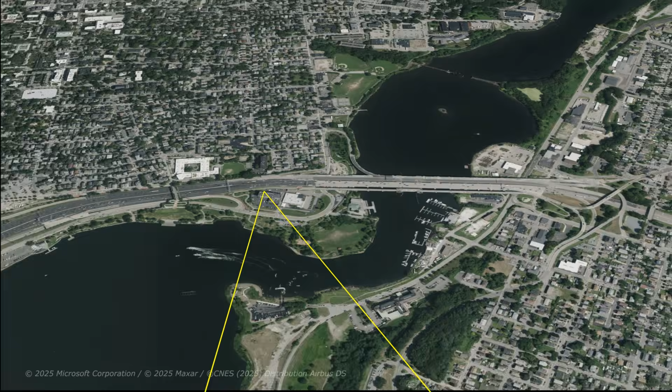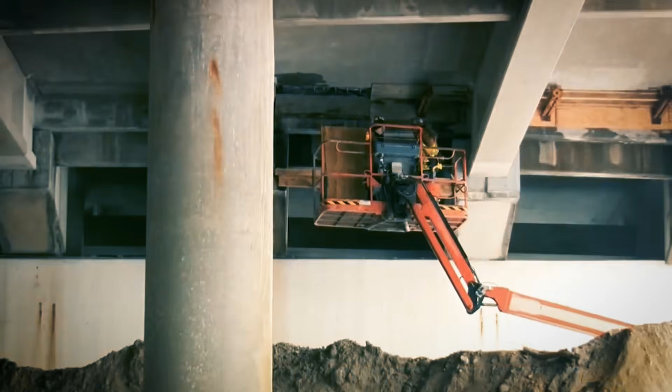In the heart of Rhode Island stands a bridge that once carried nearly 100,000 vehicles every single day. For years, it was a routine part of life, reliable, familiar, and largely unnoticed. But in December 2023, everything changed. Engineers made a shocking discovery. The structure was nearing failure. Within hours, it was shut down, triggering massive traffic disruptions, public outrage, and urgent investigations.

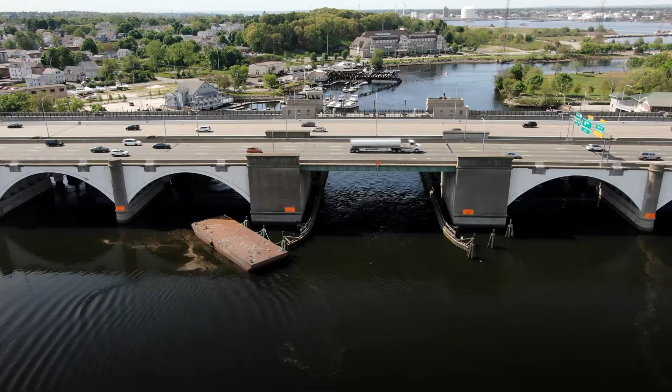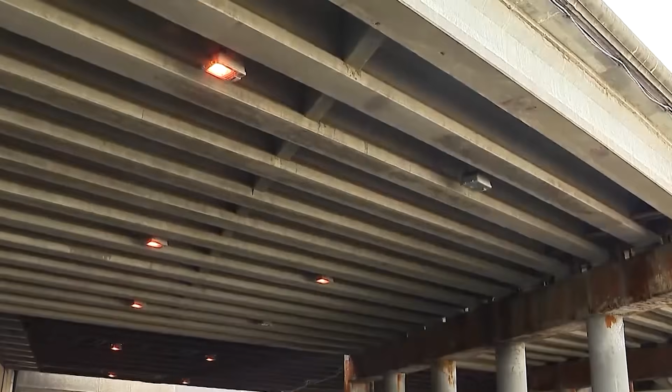The I-195 Washington Bridge, which had recently passed inspections, was suddenly deemed unsafe, setting in motion plans for its demolition and a massive rebuild. How could something so critical deteriorate unnoticed, and what went so wrong?

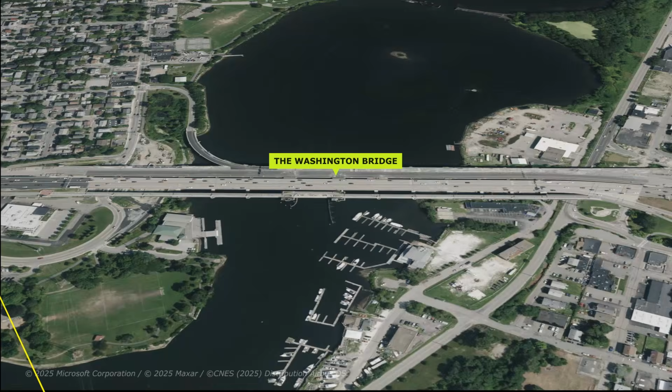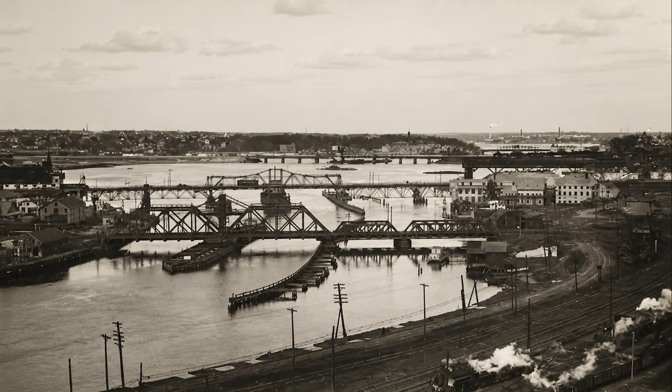The story of the Washington Bridge begins long before the modern interstate system. The Seekonk River has long separated Providence and East Providence, and as early as 1793, the first bridge was built at this location to support movement between the two communities. Over time, multiple crossings replaced one another, reflecting both advancing engineering and growing transportation demand.

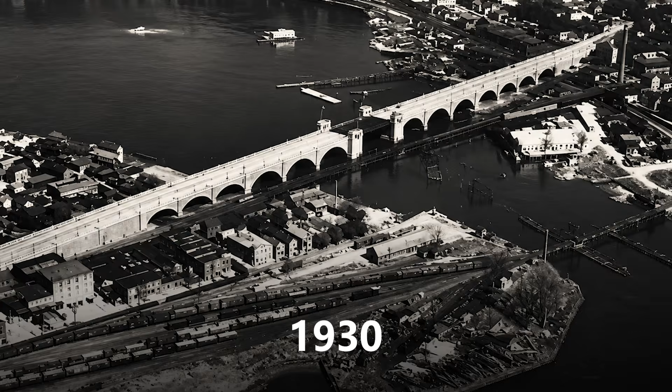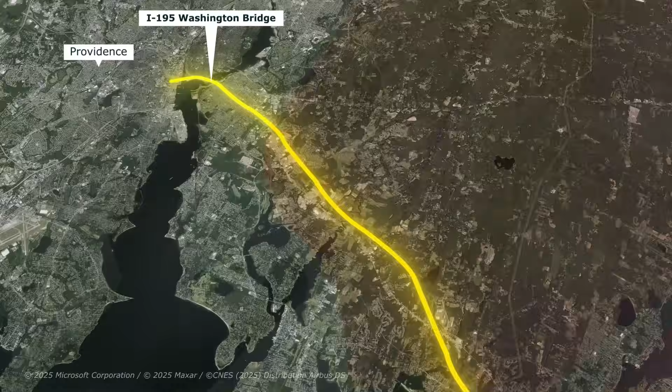In 1930, a more substantial structure, the Washington Bridge, was completed. This concrete arch bridge marked a major upgrade, accommodating rising automobile traffic and strengthening regional connectivity. However, the expansion of the United States highway system in the mid-20th century would once again transform the crossing. With the development of I-195, the corridor became a key east-west route linking Providence to southeastern Massachusetts.

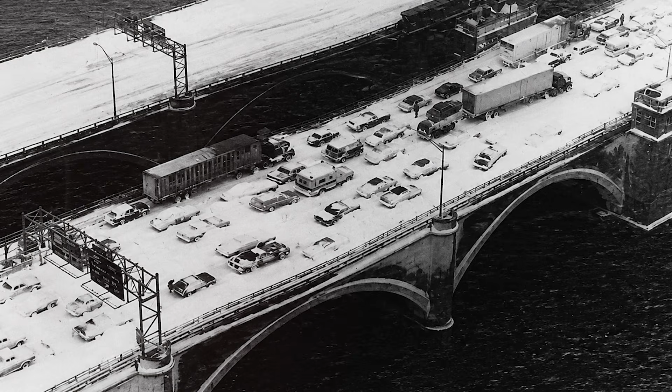To support increasing demand, new highway bridge structures were constructed in the late 1960s to carry interstate traffic. The original 1930 bridge was later repurposed and eventually converted into a pedestrian and bicycle crossing, while the newer spans handled the growing volume of vehicles.

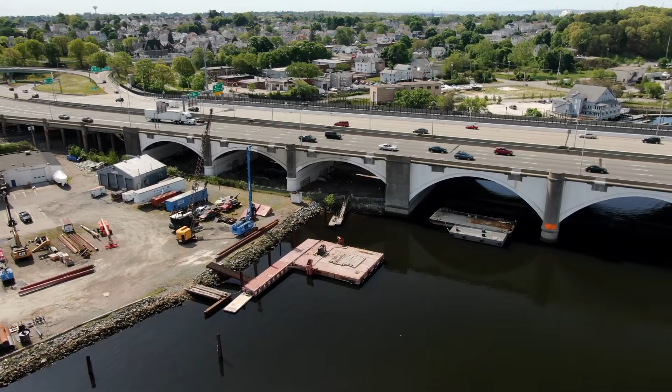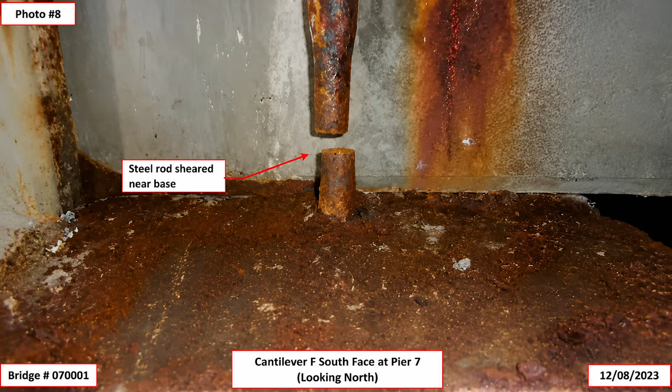By the early 21st century, the Washington Bridge had become a critical piece of infrastructure. Carrying I-195 and connecting directly to I-95, it served as a primary gateway into downtown Providence, with nearly 100,000 vehicles using the crossing each day. That role came to an abrupt halt on December 11, 2023, when the westbound bridge was suddenly closed following the discovery of a serious structural issue.

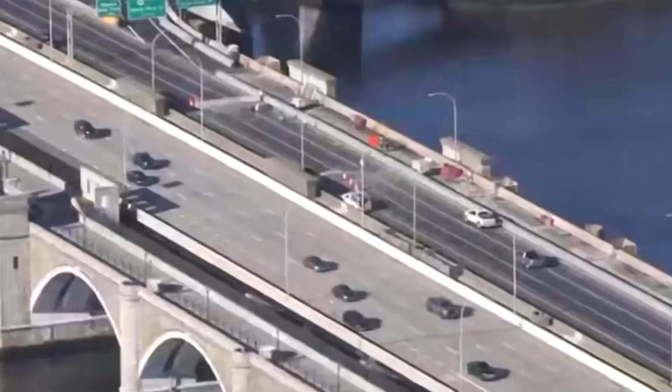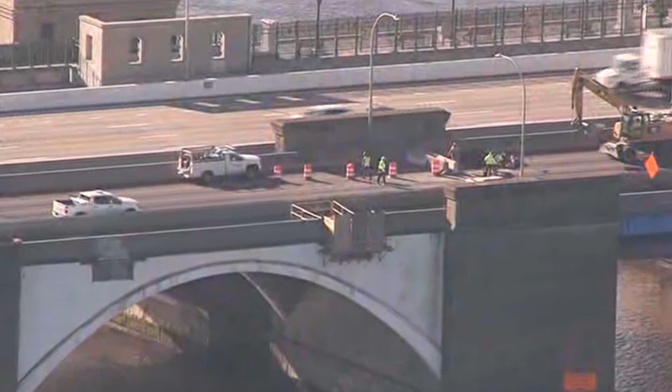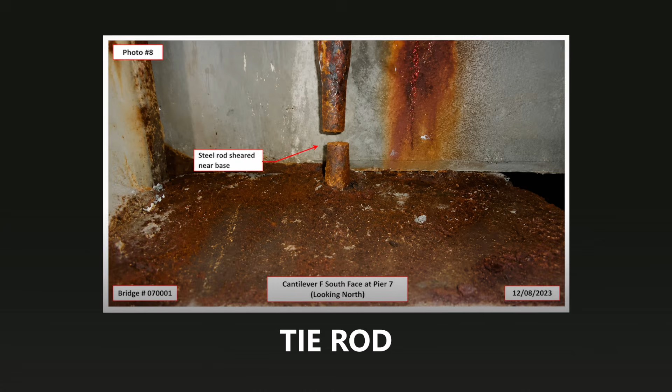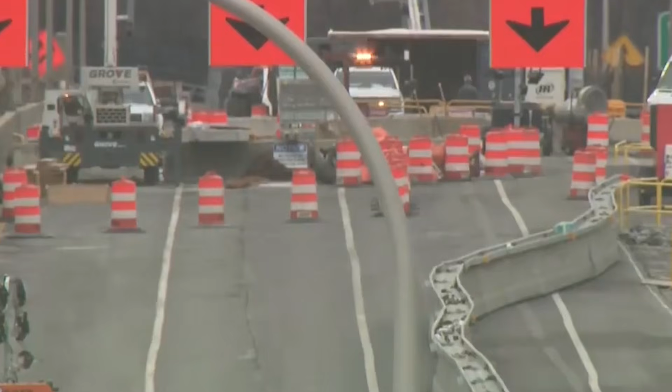In late 2023, the Washington Bridge was undergoing rehabilitation work as part of routine efforts to maintain aging infrastructure. During this process, engineers made a discovery that would quickly change the course of the project and the lives of thousands of commuters. Inspectors identified a fractured steel component known as a tie rod, a critical element that helped stabilize the bridge and distribute loads. What initially appeared to be a localized issue raised immediate concerns about the structure's integrity, and soon began to point to something far more serious.

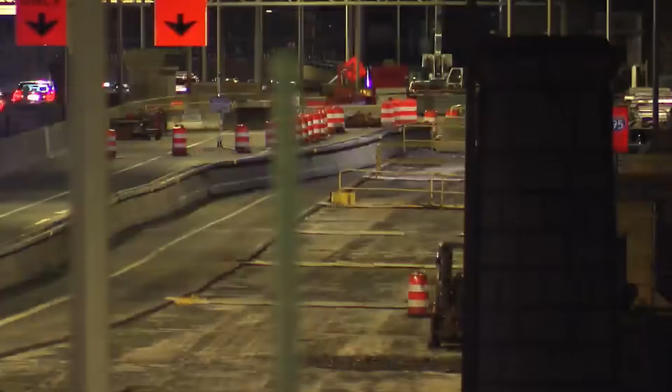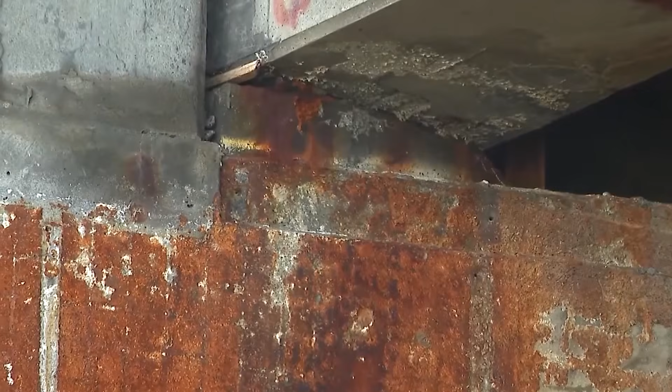On December 11, 2023, officials made the decision to close the westbound bridge without warning. The move was sudden and precautionary, driven by fears that the damage could compromise the safety of the entire structure. For a crossing that carried nearly 100,000 vehicles each day, the impact was immediate and widespread. At first, there was hope that the issue could be resolved through targeted repairs. Engineers began detailed inspections, expecting that the bridge could return to service within months.

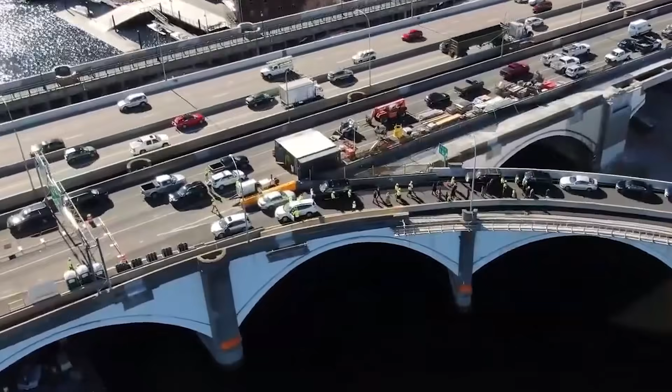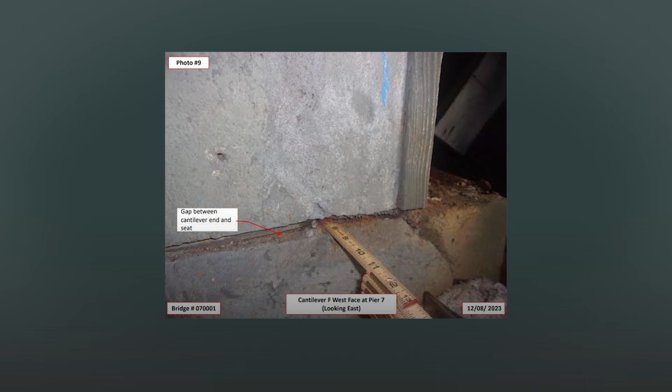But as more of the structure was examined, a troubling pattern began to emerge. The fractured tie rod was not an isolated defect. Additional inspections revealed deeper deterioration, including corrosion, fatigue, and damage to other structural elements. Much of this had developed over time and remained hidden from routine inspections. The bridge's design, with components that were difficult to access, made it challenging to fully assess their condition without more invasive investigation.

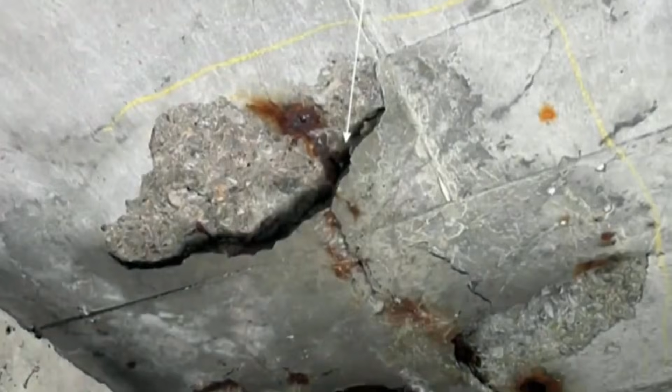As engineers gained a clearer understanding of the structure, it became increasingly evident that its reliability could no longer be guaranteed. Repairing the known issues would not necessarily address all the hidden vulnerabilities. Even if repairs were completed, there was no certainty that other critical components would not fail in the future.

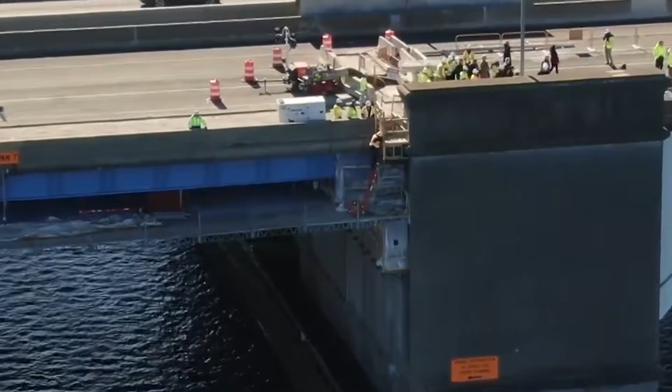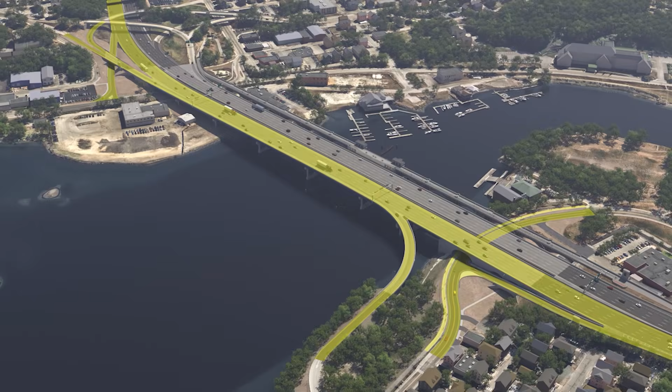By March 2024, officials made a decisive shift. Instead of attempting to repair the westbound bridge, they would demolish it and build a replacement. What began as routine maintenance had escalated into a full-scale bridge replacement, triggered by a failure few had anticipated.

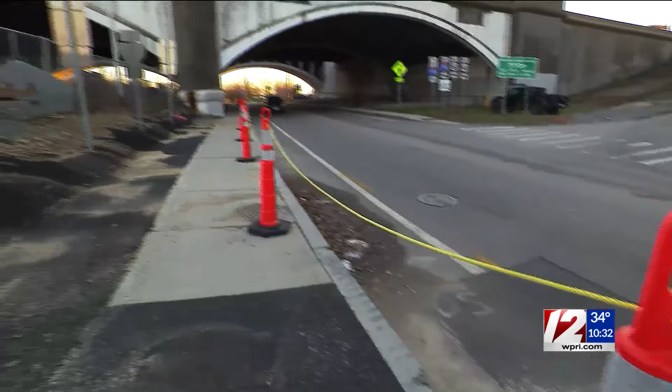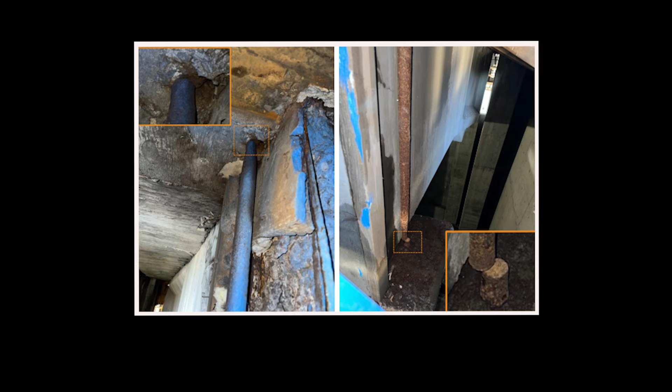As the initial shock of the closure subsided, attention quickly turned to a more troubling question. How had this happened in the first place? The Washington Bridge had undergone regular inspections and was known to be in poor condition, with ongoing maintenance over the years. However, the sudden discovery of a critical structural failure raised serious concerns about whether the full extent of the problem had ever been understood.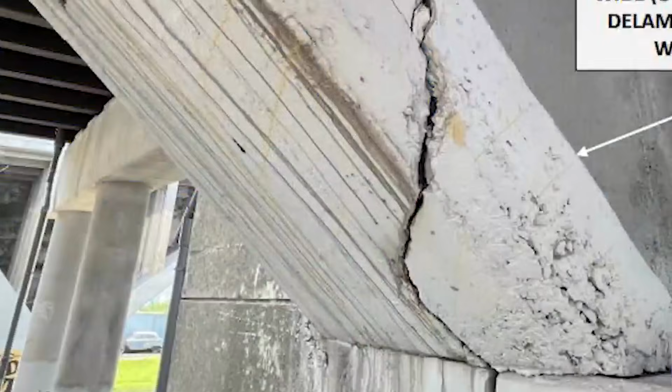Reports indicated that earlier assessments had already identified the bridge as approaching the end of its service life. A 2019 grant application reportedly described the structure as nearing permanent disrepair, suggesting that long-term replacement had been anticipated.

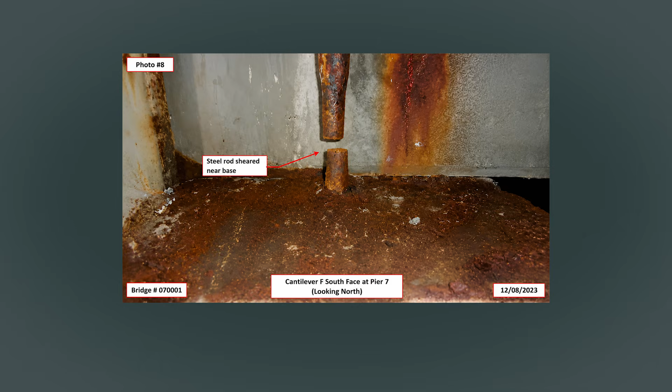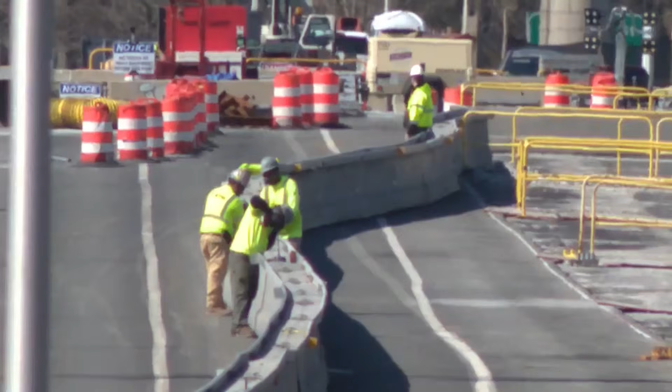Yet despite these warnings, the specific failure of the tie rods and the severity of the underlying deterioration had not been identified before the emergency closure. In response, the state of Rhode Island launched investigations into the bridge's design, construction, inspection, and maintenance history. These investigations were accompanied by legal action.

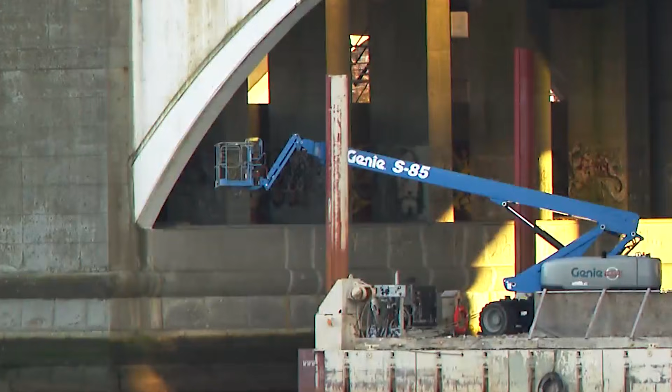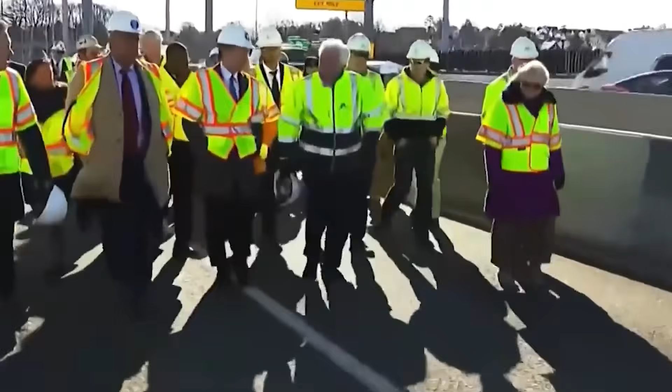The state filed lawsuits against multiple firms involved in various aspects of the bridge over the years, alleging that failures in design, inspection, or oversight may have contributed to the situation. The firms named in the lawsuits have contested these claims, arguing that they fulfilled their contractual responsibilities and that the issues may have been known or documented previously. As a result, the question of accountability remains unresolved, with legal proceedings ongoing.

What is clear is that the Washington Bridge has become a focal point for broader concerns about aging infrastructure, the limitations of traditional inspection methods, and the risks of hidden structural deterioration.

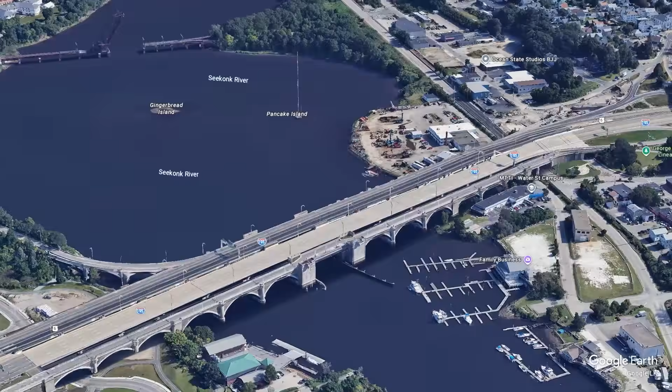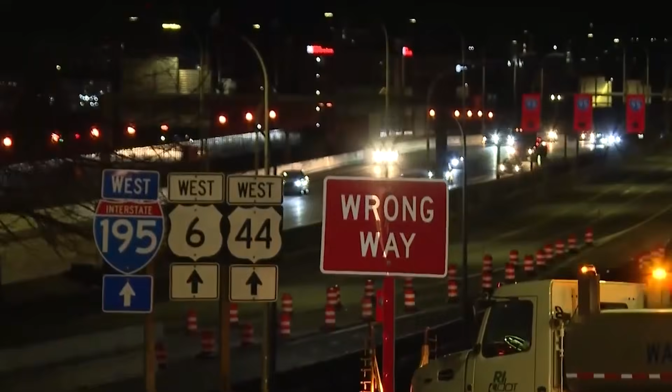While engineers and investigators worked to understand what went wrong, the immediate impact of the closure was felt across the region. The Washington Bridge was not easily replaceable, and shutting down the westbound side forced traffic onto alternate routes, creating severe congestion. Commutes that once took minutes stretched into hours, particularly during peak travel times. Drivers faced unpredictable delays, and the ripple effects extended far beyond the immediate area.

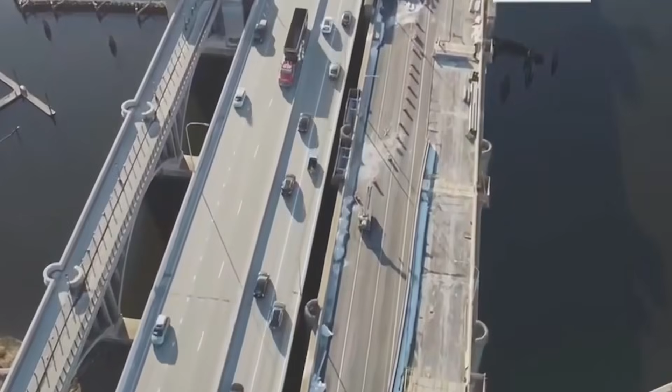To ease the disruption, officials introduced a temporary traffic configuration, allowing westbound vehicles to share lanes on the eastbound bridge. While this restored some connectivity, it reduced overall capacity and increased congestion in both directions. The economic impact was significant. Businesses faced delivery delays, reduced customer access, and rising transportation costs. Freight movement slowed, disrupting supply chains, while emergency services had to navigate longer routes and extended response times.

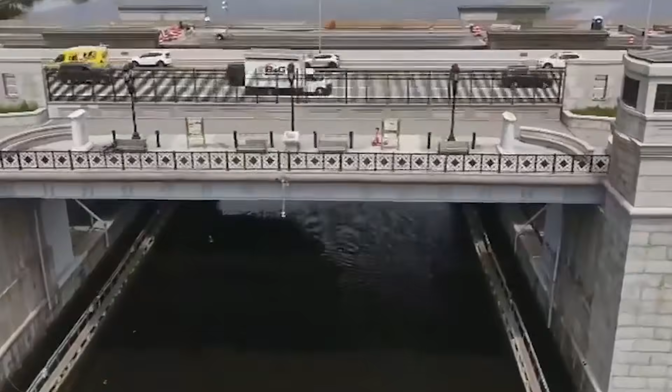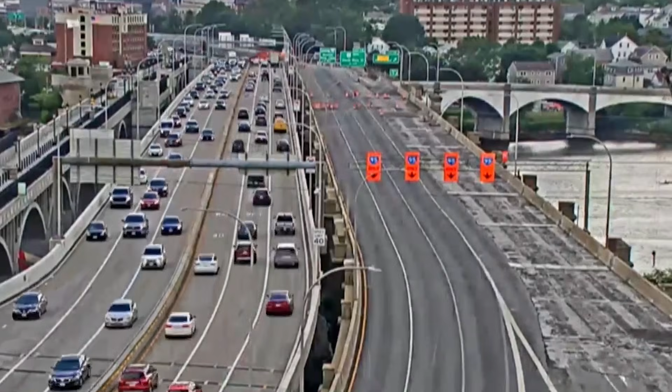Public frustration quickly intensified. Residents and commuters demanded answers, questioning how such a failure could occur on a major interstate bridge. Political pressure mounted as officials worked to manage both the immediate crisis and a long-term solution. The Washington Bridge, once a routine part of daily life, had become a major disruption and a symbol of wider infrastructure challenges.

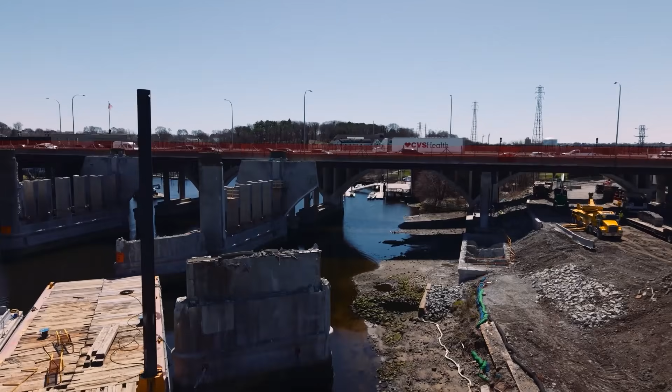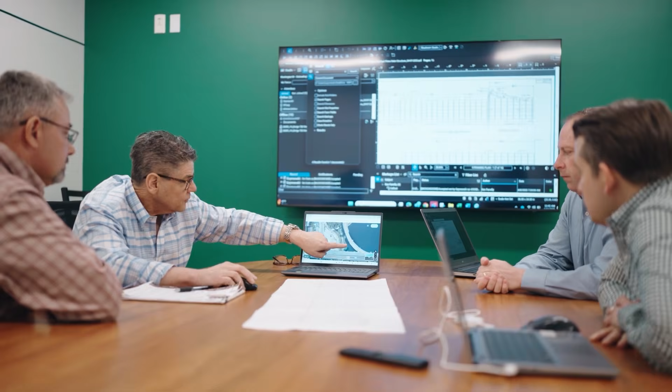Faced with the reality that the existing structure could not be safely repaired, Rhode Island moved forward with plans to replace the westbound Washington Bridge entirely. The replacement project, valued at around $428 million, represents a significant investment in restoring one of the state's most important transportation links. Walsh Construction was selected as the contractor, bringing experience in large-scale infrastructure projects.

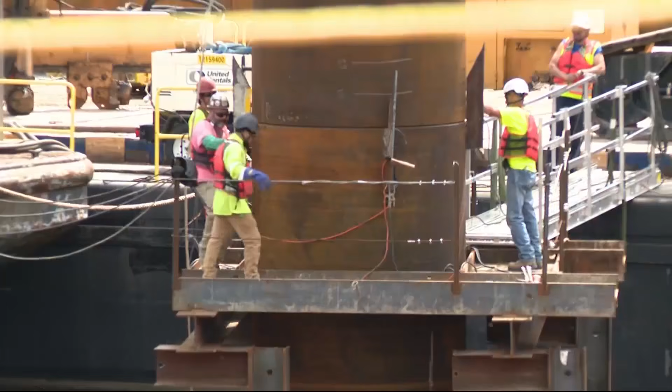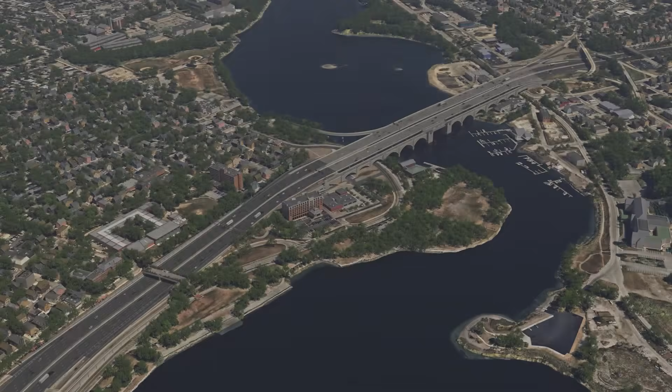Unlike some modern bridge projects that emphasize architectural design or visual impact, the new Washington Bridge is intentionally practical. It is being built as a modern steel multi-girder bridge, prioritizing safety, durability, and efficiency. The design focuses on long-term performance rather than aesthetic distinction, reflecting the urgent need to restore functionality.

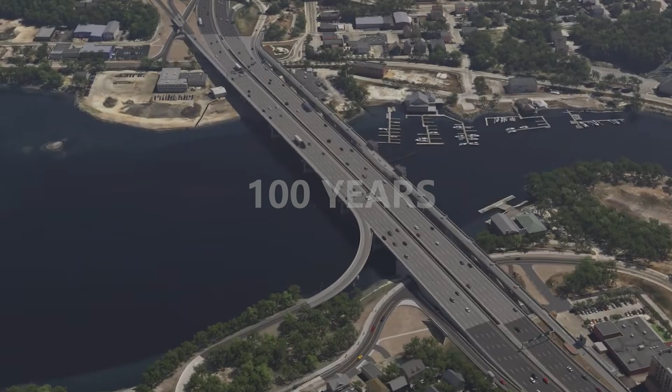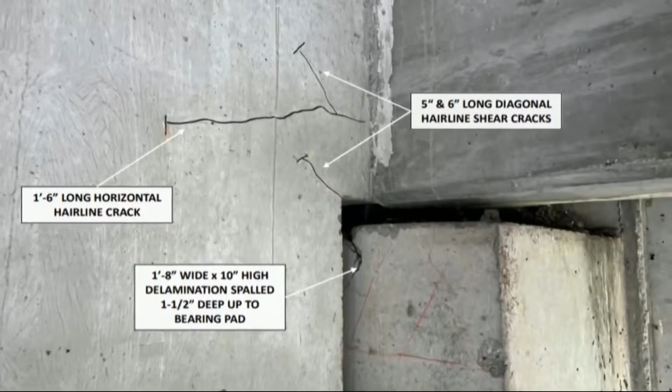The new structure is expected to have a service life of approximately 100 years. It will include wider shoulders, improved structural redundancy, and enhanced corrosion protection. These features are intended to address many of the issues that contributed to the failure of the previous bridge, while also making future inspections and maintenance more effective.

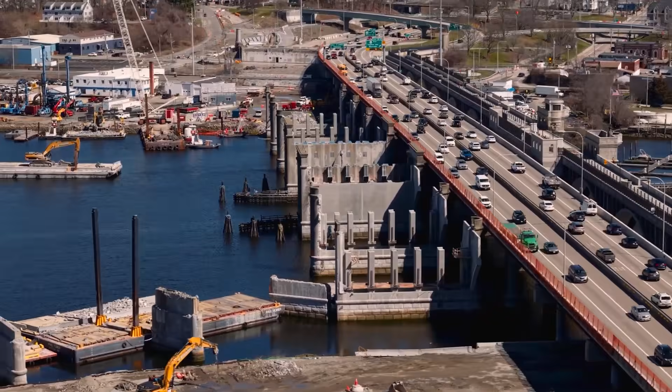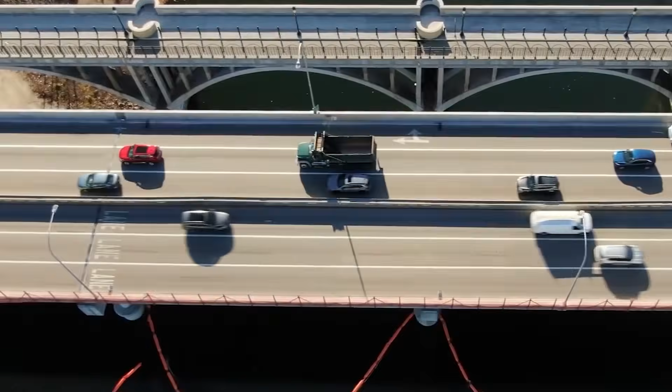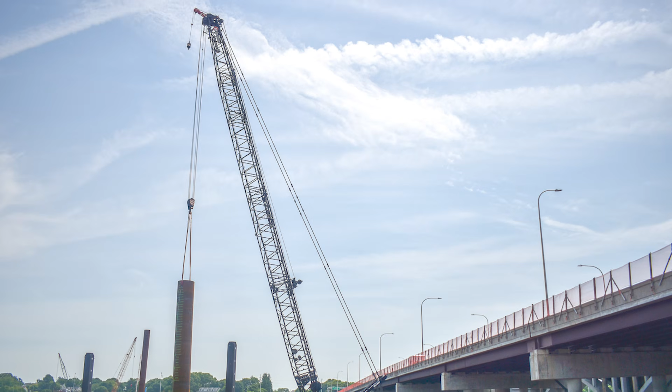One of the most challenging aspects of the project is the need to maintain traffic flow during construction. With I-195 remaining a critical corridor, the replacement is being carried out in phases, allowing vehicles to continue crossing the river using the remaining bridge structure. The existing westbound bridge is being demolished in phases, alongside construction of its replacement. This approach requires careful coordination, as demolition and construction activities take place alongside active traffic.

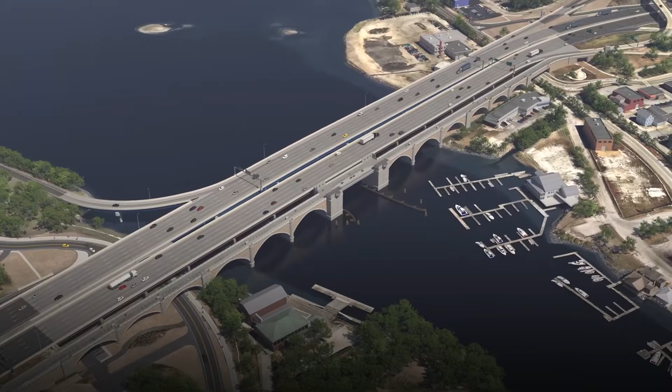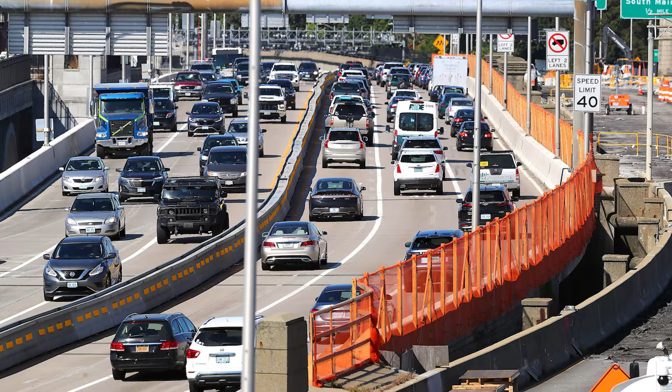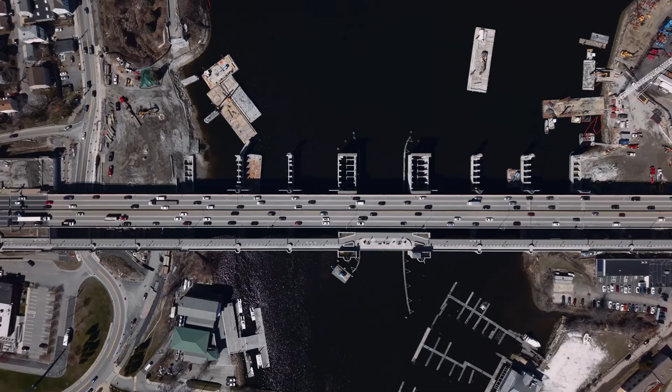Construction began in 2025, with the new westbound bridge expected to open to traffic in late 2028. Final project completion is anticipated in 2029. Once completed, the new bridge will restore full capacity to the corridor, reducing congestion and improving reliability for commuters and businesses alike. While the new Washington Bridge may not become an architectural landmark, its importance lies in its function. It is being built to ensure that one of Rhode Island's busiest highways can once again operate safely and efficiently.

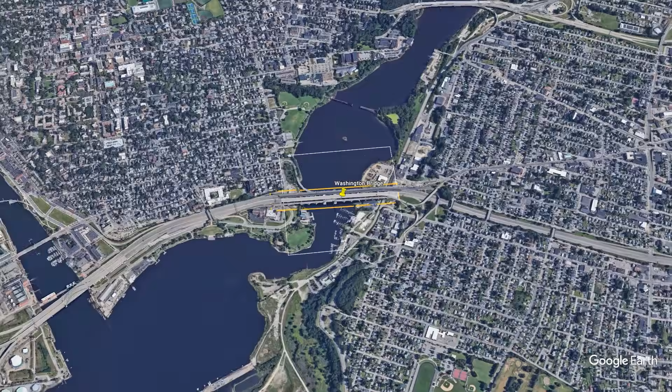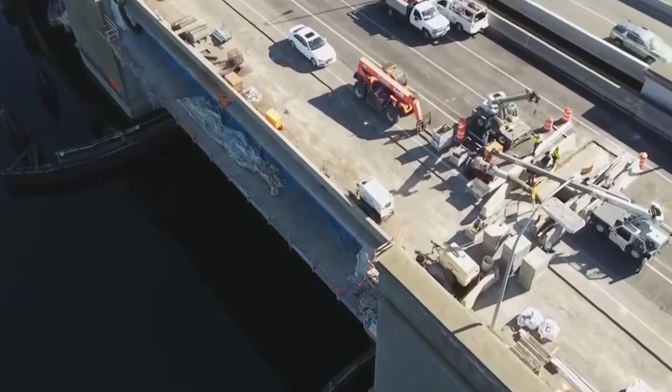The Washington Bridge is more than a local project. It highlights the broader challenges facing aging infrastructure across the United States. Many bridges built in the mid-20th century are now nearing or exceeding their intended lifespans, making them increasingly vulnerable to corrosion, fatigue, and hidden structural deterioration. Identifying these issues requires not just routine inspections, but more advanced methods capable of detecting problems that are not immediately visible.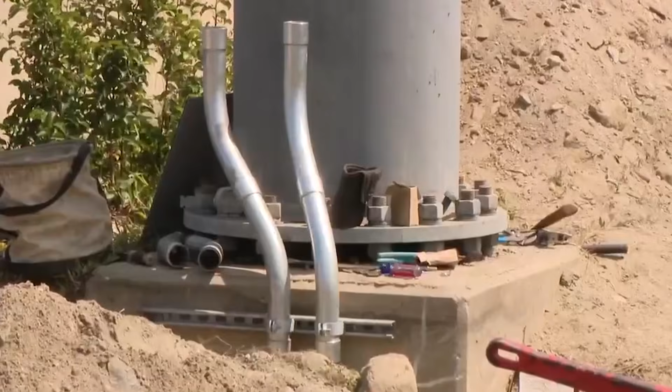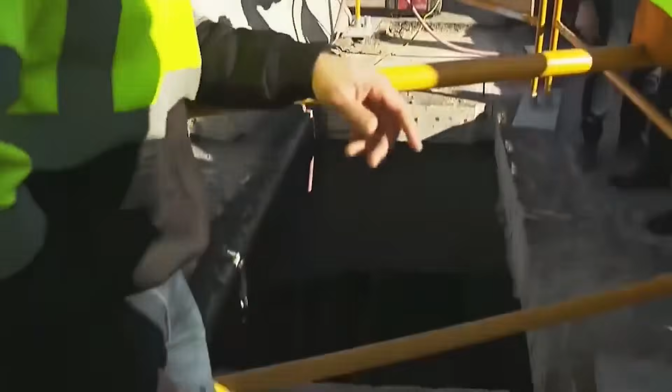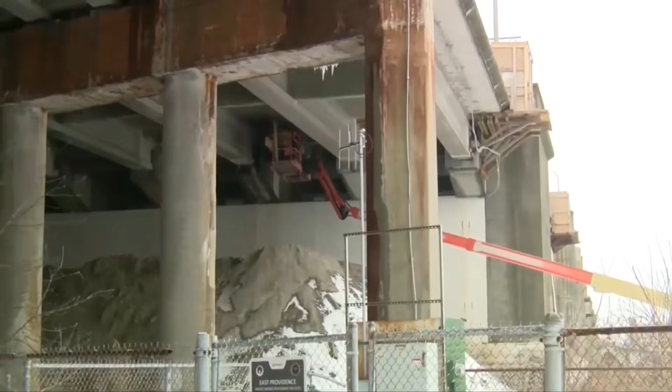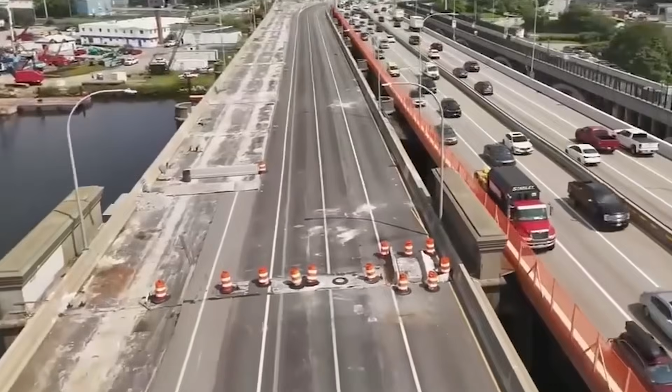The events surrounding the Washington Bridge demonstrate how even heavily used and regularly inspected structures can develop critical failures that remain undetected until they reach a tipping point. They also underscore the importance of public trust, as infrastructure safety is often taken for granted until it is suddenly questioned. As the new Washington Bridge takes shape, it offers an opportunity to improve inspection practices and infrastructure management, ensuring that similar failures are better anticipated and prevented in the future.